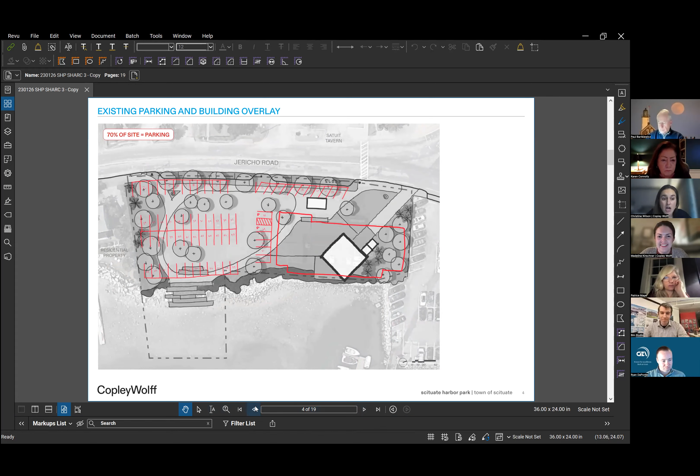70% of the site right now is parking. This first concept looks at parking being reduced significantly. Concept 1 has only 11% of the site dedicated to parking. I want to call that out - for each concept, the top left corner shows the percent of the site dedicated to parking. On all 3 concepts, we're looking to create a park, not a parking lot.

In all 3 concepts there is a pavilion, though its location changes. You'll see with Leon that the pavilion design changes, but the ideas presented for a pavilion in one location could be applied to a pavilion in another location. The parking lots, trees, boardwalk, and pathways can all shift, and honestly will be refined as we move through the design process.

Each of these concepts has 10 to 14 parking spaces. This one shows 10 angled spots, with the pavilion on the north side of the parcel, closer to the private marina, and then a boardwalk. All 3 concepts have a boardwalk, just a little different in form and how it lays out on the site - open lawn, bioretention, planting areas with native plantings, and on all three we're molding that shoreline for resiliency, naturalizing the shoreline.

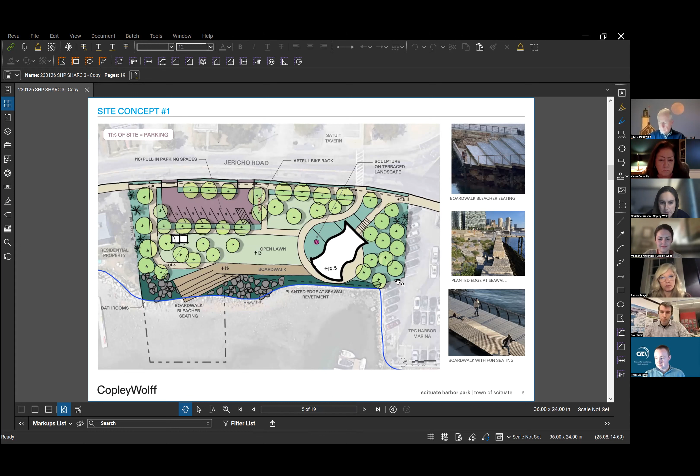If we move to the next concept, this one is different because it has a pier that goes out over the water, with the pavilion located on the pier - that's the big move here. The previous concept is probably the easiest to permit; this one will definitely be the most complicated to permit. It's doable, and Ryan can dig into that if there are questions. Because the pavilion is out over the mean high water line with pilings, it will be the most complicated and most costly. But it's really cool from a public benefit perspective to get people out over the water, to see up and down the harbor and feel like you're out in the harbor - a great public benefit.

This, similarly to the last one, is a different form of the boardwalk with these boardwalk nodes, seating areas, and open lawn areas. All concepts have open lawn areas, and all the concepts have bioretention and planting areas for treating stormwater.

This concept has the parking in a similar area, but while the last one had a pull-in and pull-out so the sloop shuttle could come in and out, this one just has one curb cut. Closer to the crosswalk that connects over to Satuit Tavern, the sloop can pull in over there.

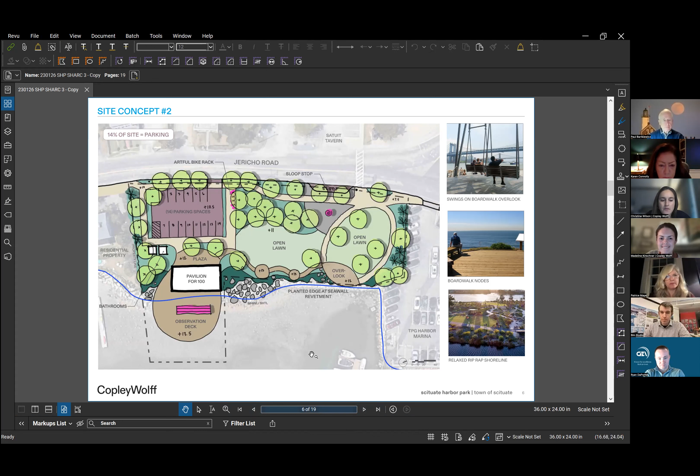Our final concept really flips the parking over to the north side, toward the marina. The pavilion is centered more on the site, north and south, and in this one it's more in the middle of the site with a spill-out plaza behind it and the boardwalk that runs on either side.

That boardwalk runs over this living shoreline that cuts more into the site, relaxing the shoreline a little more and bringing it more into the site. So the boardwalk goes over the shoreline.

We're exploring options for bleachers or stairs - not to get down into the water to launch kayaks or anything, but just to see the sea level rise and get a little closer to the water. We're exploring accessible access down to it, like a ramp, so everyone can enjoy that multi-level experience.

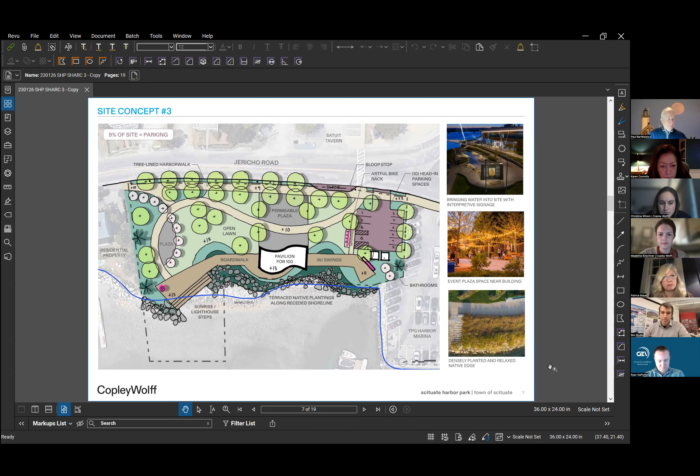If we move on to the last slide, this shows all three concepts together. You can see how the pavilion location shifts between the three, the parking lot layout - angled versus head-in parking - where the curb cuts are located varies in each one, and the shape of the boardwalk and how the shoreline is modified along that whole edge.

The little white squares are bathrooms. We're looking at resilient, comfortable bathrooms, potentially modular ones that, like the pavilion, are designed to be flooded. At the bottom you see the summary - 11% of the site is parking, then 14%, then 9%. So again, the majority of the site is park, which I think is really important.

All the environmental benefits this park will provide will be amazing, but also all the activity that can occur here - whether going to the tavern for lunch or dinner overlooking the harbor toward the lighthouse. We have swings, we could have cool, durable, funky lounge furniture out on the boardwalk. We could have events like a walking or running event, art market, farmer's market, maybe wedding ceremonies with a spot for photos, a place to throw around a Frisbee and have a picnic - that's what we heard from the last meeting this group thought made sense for this park.

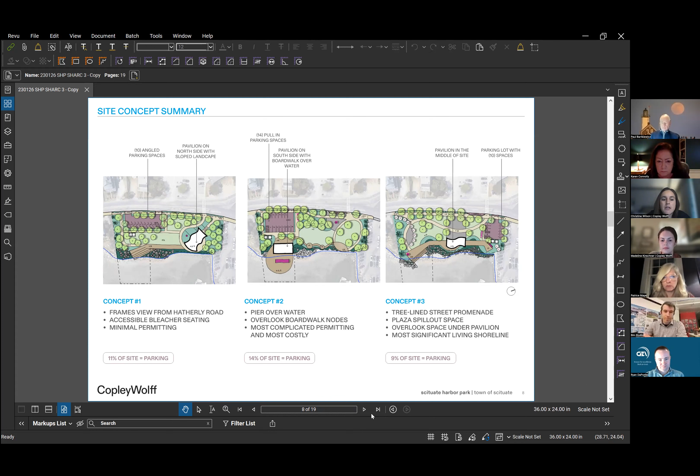Thanks, Christine. Before we dig into the concepts themselves, I wanted to do a little introduction. At this stage, we're very early in the design process, and part of the idea is that we wanted to get concepts in front of your group early that are still very malleable, which gives us the opportunity to take your feedback and reactions to what we're developing. As we move forward, we can discard ideas or bring in new ideas you may have. I just wanted to preface it with that.

The other thing I wanted to plant as a seed in your minds is that we heard early on there was a desire for this pavilion to be iconic, but iconic in a way that's representative of Scituate. To that end, I think you guys are the best arbiters of what is resonant to the town and what feels appropriate. So we've taken three very distinct approaches in these concepts that you'll see, and they're meant to have varying degrees of uniqueness. We've also tried to take concepts that feel appropriate to the town and your relationship with the water.

With that, I'll jump into this first scheme, which we're calling the Wave. This is meant to be a very sculptural pavilion that's a representation of Scituate's relationship with the harbor and the water. Obviously, that's a major driver in the history of the town.

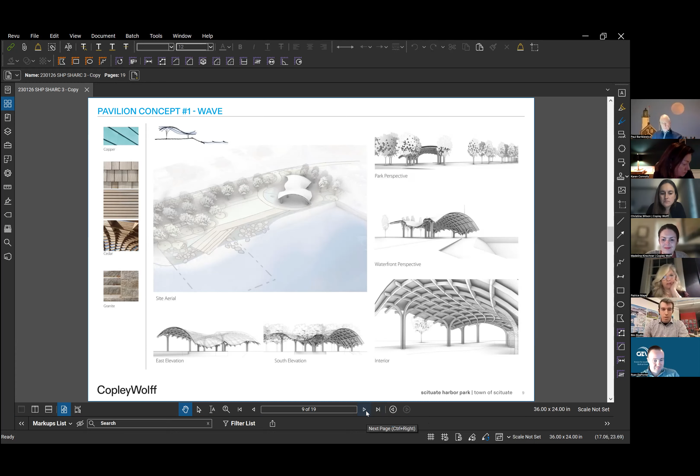For the next scheme, maybe we can jump ahead. This scheme, which we're calling the Reflected Pier—the idea here is to take the very dynamic plane of the water's surface and lift it up into the ceiling of the pavilion, creating a space that gives you a sense of that fluid motion happening down below you if you're on the pier, or next to you if you're not.

To achieve this, we would build a masonry column pier structure, which you're seeing as the more orthogonal framed structure. Those are meant to really define the interior space and give us some opportunities for enclosure. There are a number of different flexible enclosure systems that we're going to touch on at the end, which, depending on how you envision using the pavilion, we could implement in very different ways.

Those piers are meant to frame views and give you some very specific views looking out into the harbor and into the park.

The roof itself would be curving glulam beams, emulating that fluid water expression. They're also covered with a diffused fiberglass roofing system, which is a durable and cost-effective way to do a skylight.

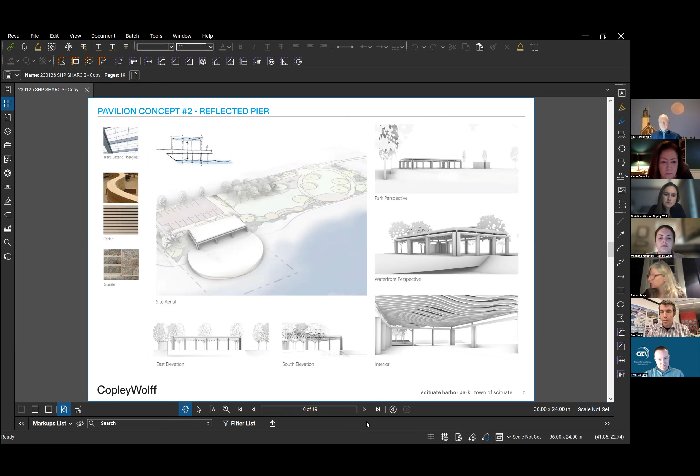It's meant to be a very serene and enclosed space that gives you a unique understanding of your connection to the water on this site.

The third scheme is a play on the traditional New England gable. We're taking a simple extrusion of a gable form, then allowing the dynamic shoreline curving edge that the park has created to inform the building shape.

The building then pushes and pulls along the boardwalk to create a very nice promenade enclosed space.

Similar to the last scheme, we're envisioning a masonry column used in the floodable zone, and above that would be a cedar wood structure capped with a skylight at the ridge.

That creates a very bright and kind of uplifting space to be in while you're next to the water.

It also gives you great shelter and great views in both directions, to the water and back to the park. On the water side, we have a wider spacing between the columns, directing your view out into the harbor.

We'd have the opportunity to play with tightening that up on the park side, giving you opportunities to really enclose and define that space at a tighter scale.

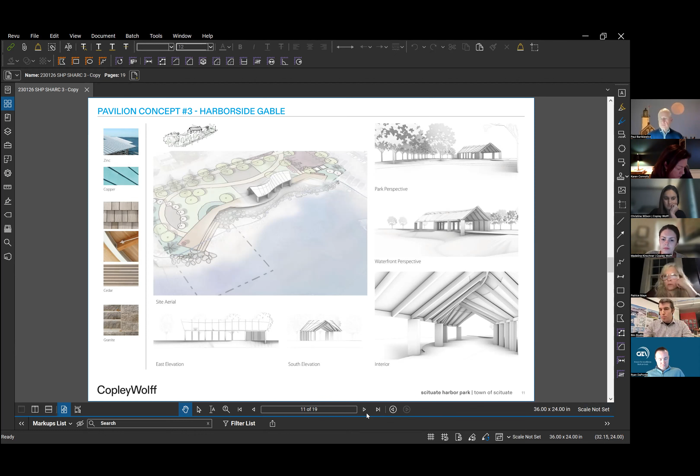With that, maybe I'll jump into the enclosure concepts, and then we can circle back and get your reactions to each of the schemes. We wanted to touch on enclosure because that was such a big piece of the discussion early on, and I know there's a desire for these pavilions to be enclosable to some extent.

There really are quite a few ways we could do that. It comes down to how you would envision actually operating the facility, because some enclosure schemes are much more appropriate to being operated by the public themselves, while others would really require someone from facilities or maintenance to set up and take down.

The other thing to keep in mind is we have a spectrum of options in terms of how enclosed the space feels. Are you doing something that's glass that maintains a view out to the park and water, or something that's screening and gives you more of a sense that this is an interior space? We could do a little bit of both on different sides of the pavilion.

That would certainly be an option. The other piece is we have a spectrum of how much weather protection we're getting. Something like a wood screen gives you the feeling of an enclosed space, but it's obviously not going to prevent wind and rain the same way a glass system would.

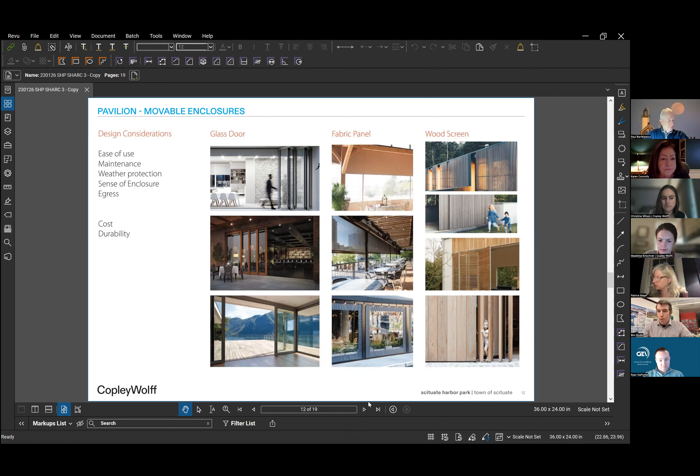So with that, I'd love to open it up to discussion and hear your thoughts.

But in my opinion, the one we'd get the most use out of would probably be the third, the Harborside Gable, because with the wave I see issues with retrofitting or creating enclosures to fit it. It would require everything to be more custom, where with the straight lines of either the Reflected Pier or the Harborside Gable, the edges are straighter, so I think it would be easier to get those enclosures.

Sorry to interrupt, is my screen flashing or is it just me? It's not flashing, but there are grayed out bars, rectangles. Oh, okay. Madeline, I'm going to hand it back to you.

Gotcha, I'm so sorry, I thought I fixed it. But honestly, Patrice, I love all three of the concepts, and as we've said before with the concepts in general, I could be happy with any of them. I have my preferences, but I love the design work you've undertaken. I feel that you listen and you respond, so thank you for that.

Great, thanks Patrice. Let's get other comments from the commission members and then to the public. And I did want to note that Chris Connor and Steve Pisa have joined us. Karen Connolly, comments or questions?

Oh, comments from me? Well, I will say I have to admit they're all very nice. The wavy one, I would be concerned about, though the architect knows better. I'm just concerned about the site and what kind of wind we experience down there, and the one that's more modulating or undulating almost looks like it wants to fly away.

And I am also concerned, when I heard the word copper, I got very concerned about that. Copper is extremely expensive and difficult to come by these days. So as much as I like it as an architectural feature, unless it was simply a feature and not the whole roof, we do have to be concerned about costs here. And I guess, so I'm not going to tell you I'd pick one design over the other, but the other thing I think we probably can't afford are enclosures, for a variety of reasons.

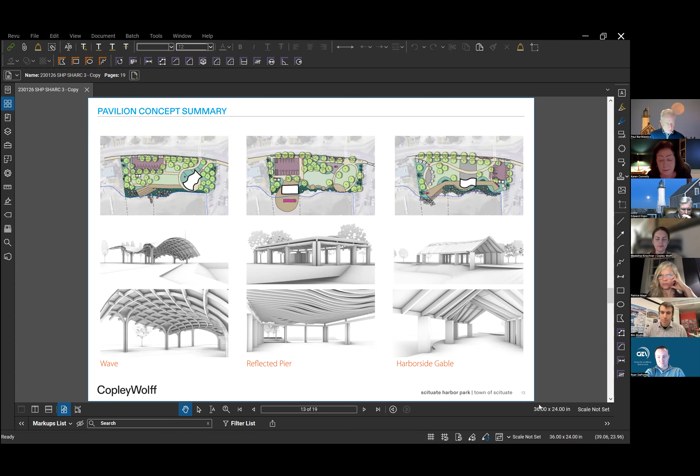Thanks, Jennifer. Would you be able to elaborate on why you like number 3 the best? Oh, why I like number 3 the best?

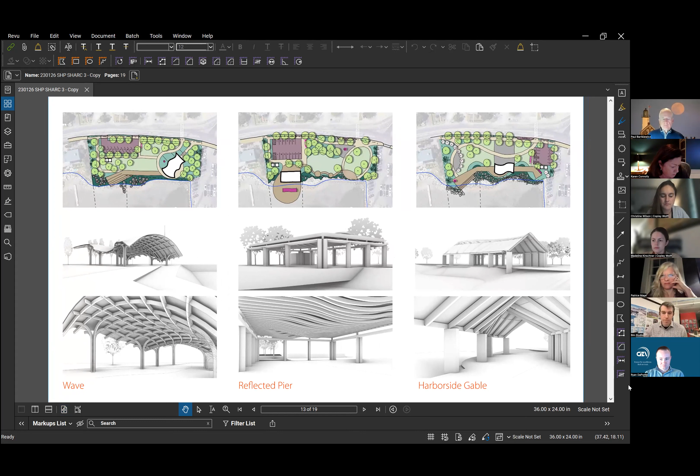I think it has more—and again, I'm not an architect, I'm not a designer, but to my eye, it just looks like it has more open space than the others. And I think that was the one, maybe I'm wrong, but you could have sort of the stairs down to the water, or could you do that? And I know you can mix and match the concepts possibly, but those were the things that stuck out to me. I just felt like it had a little more open space based on the picture. Yeah, no, that's perfect. That's super helpful. Okay, thanks.

Thank you. Howie? I like the third one a lot, and I like the idea of the tiered type seating going down to the waterfront, if I'm understanding this right. I just have one question on that piece of it. Is there any opportunity for us to put some sort of small float there, where a transient boater with a little dinghy could row up and be able to use the facility?

Might that be an opportunity? Well, Ryan, there is a launch area right in the marina. I think that Karen, Corey, and the public have access to that.

Yeah, it's kind of just off the page in this view. We have some other views that show that marina float, just right south of the site. And you can see—I didn't highlight this, but the property line jogs where... thank you, Madeline. So on the left side, the south side of the site, it goes out to mean low water, but on the other two-thirds of the north part of the site, it really follows the top of that riprap slope. And so the marina owns that.

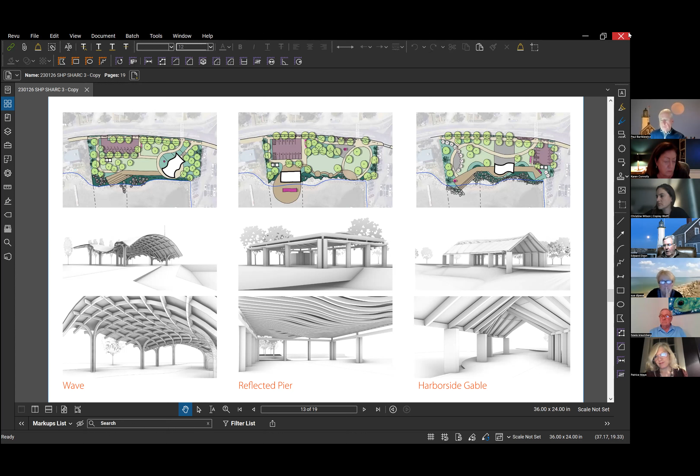Well, and it's all fairly moot at this point anyhow, due to the environmental sensitivity of the area. So given the floodplain issues and everything else, it was an early wish list discussion. Scott Payne, the athletic director who's on this call, was in that as well. We had conversations with some, but hadn't taken it formally to the school because we've been working through this conceptual phase. Now that we're reaching this point, I think the school, at least my interest, is going to be withdrawn.

I just wish you all a lot of luck on this park. It looks beautiful. And to reiterate what Scott said before, I think it'll be a wonderful addition to the harbor.

Thank you, Ed. Hey, so Christine, I want to throw it back to you, Paul, and let's move forward with the rest of your presentation.

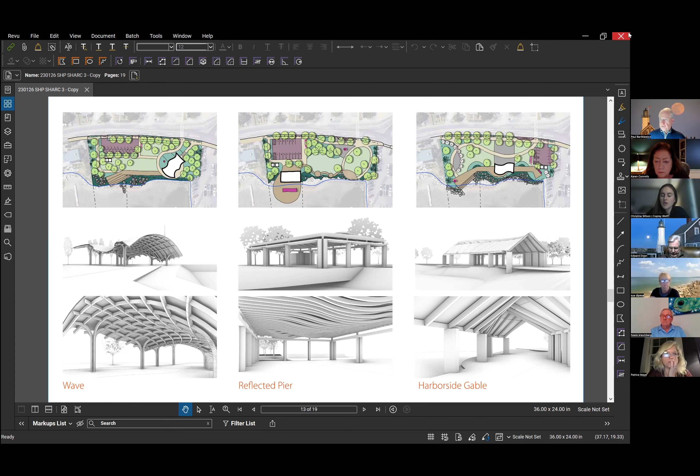Okay, great. So I really want to talk about the next couple months and how we move forward, but I'm going to throw this up. We can dig into this as we move forward, but wanted to flash this up onto the screen.